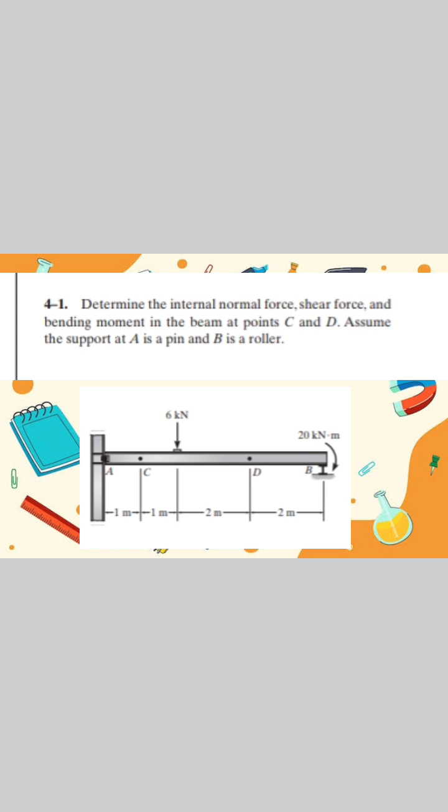In this video, I'm going to solve one of the problems in structural theory, problem 4-1: determine the internal normal force, shear force, and bending moment in the beam at points C and D. Assume the support at A is a pin and B is a roller. Let's get started.

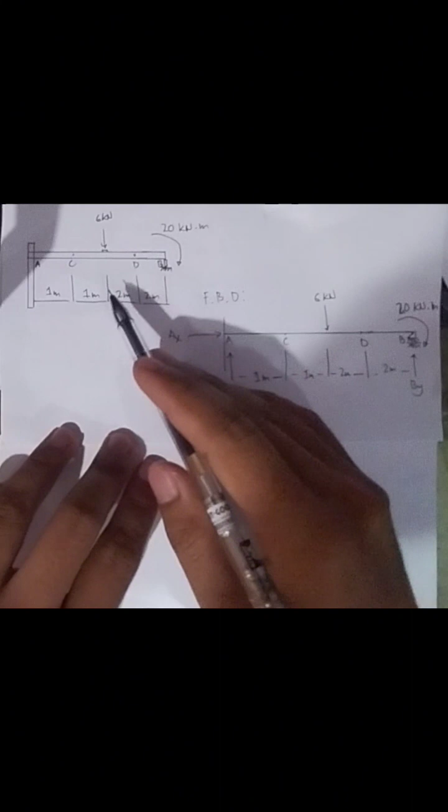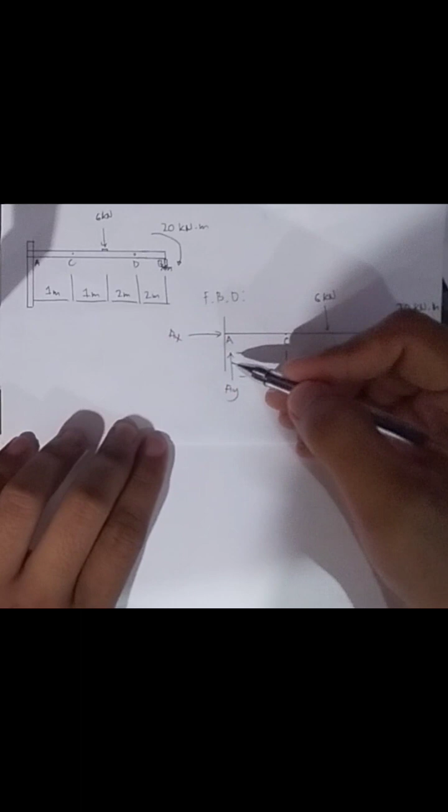First, let's draw the free body diagram of the given problem. The problem states that point A is a pin support, which we know has two reactions: horizontal and vertical. So that's AX and AY.

Next is point B, which is a roller. We know that a roller can only resist vertical forces, which is BY. So we'll take the moment at A to find the missing BY.

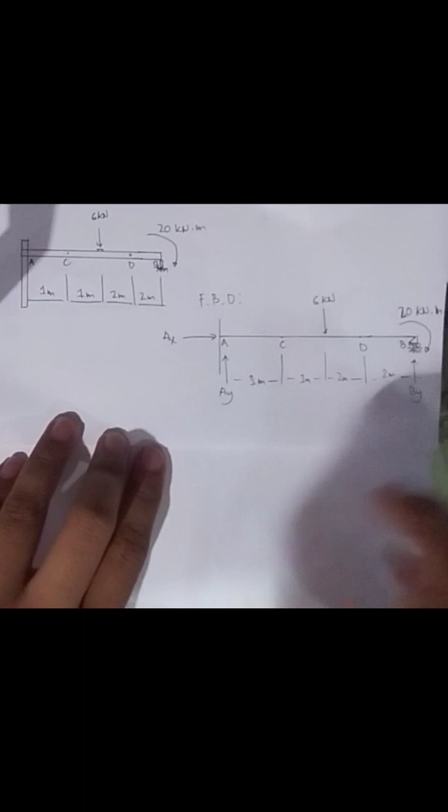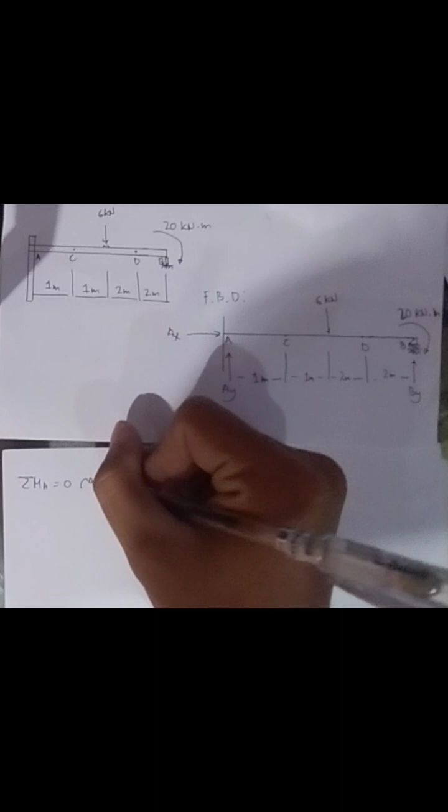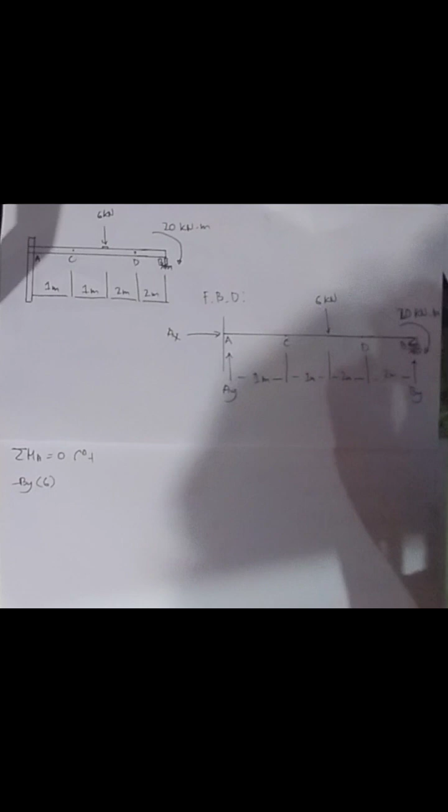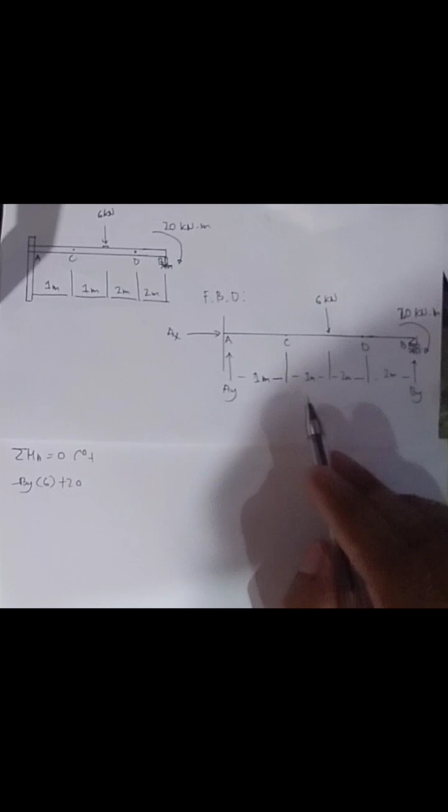Summation of moment at A equals 0, with clockwise as positive. First is BY, which goes counterclockwise, so it's negative. Negative BY times its moment arm of 2 plus 2 plus 1 plus 1, which is 6 total. Then the 20 kN·m goes clockwise, and it doesn't need a moment arm since it's already in kilonewton-meters, so plus 20. Last is the 6 kN going clockwise, with a moment arm of 2, so plus 6 times 2, equals 0.

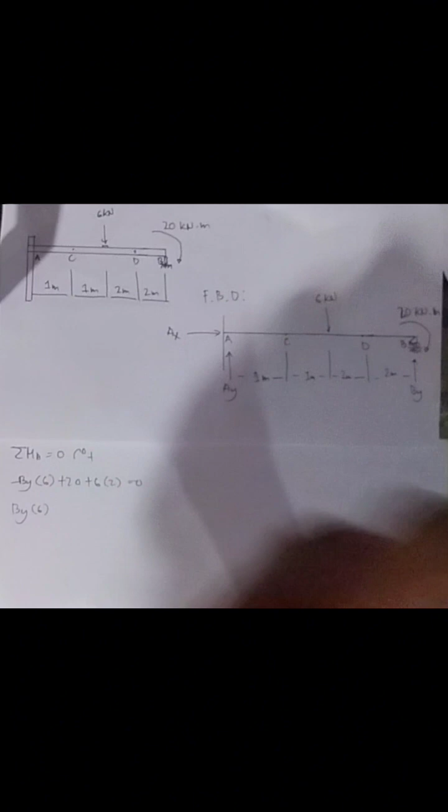Let's transpose the BY to the other side, making negative BY positive. So BY times 6 equals 20 plus 6 times 2. Let's calculate: 20 plus 6 times 2 equals 32.

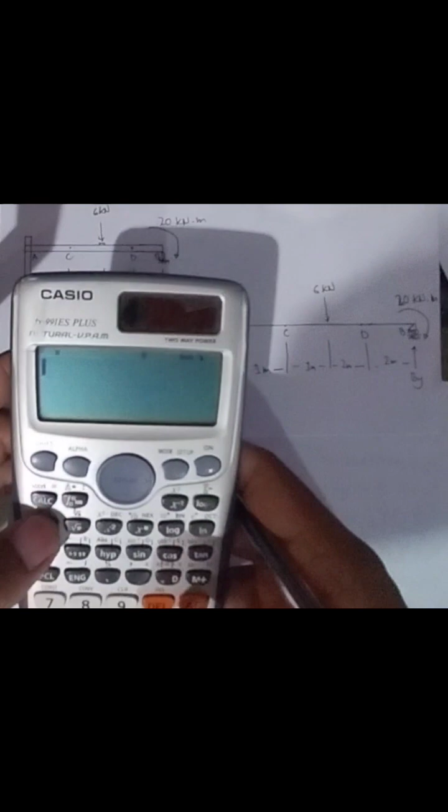So BY times 6 equals 32. Let's divide both sides by 6 to cancel it out. 32 divided by 6 equals 5.333. So our BY equals 5.333 kN. Next, we'll find AY.

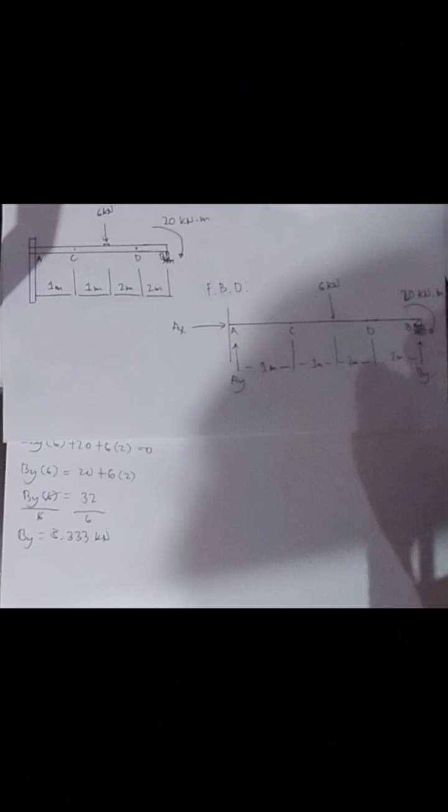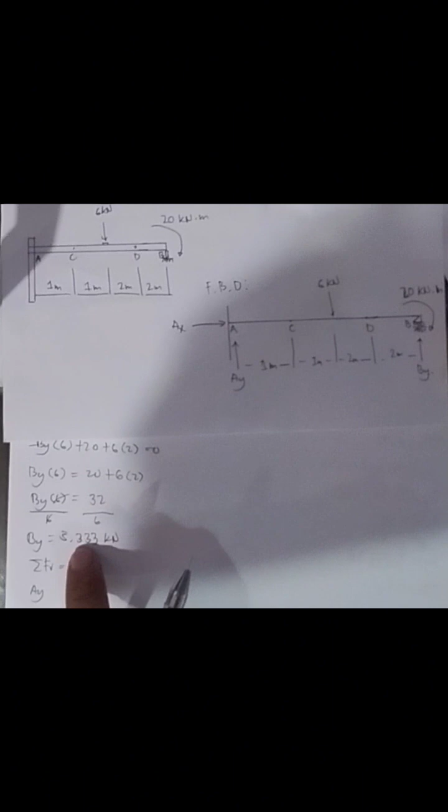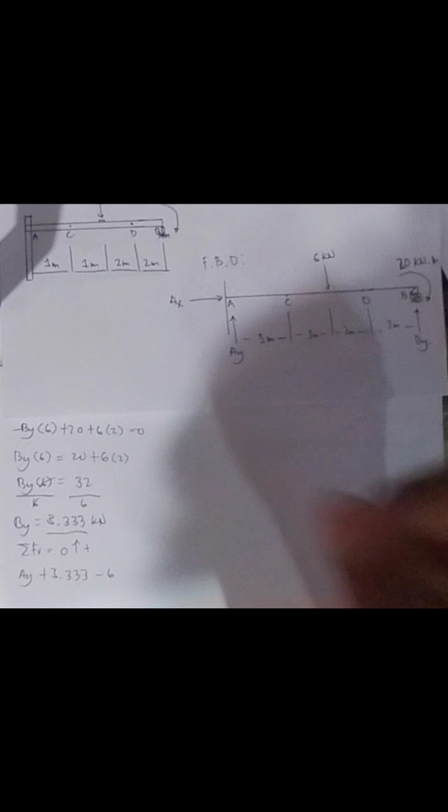Next is our BY value, which is 5.333, going upward so it's positive. Next is the 6 kN going downward, so it's negative, minus 6, equals 0. Let's move these terms to the other side: positive 5.333 becomes negative, and negative 6 becomes positive.

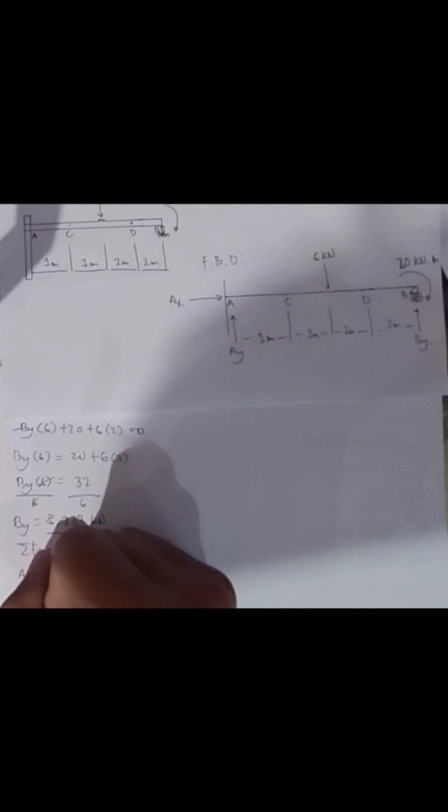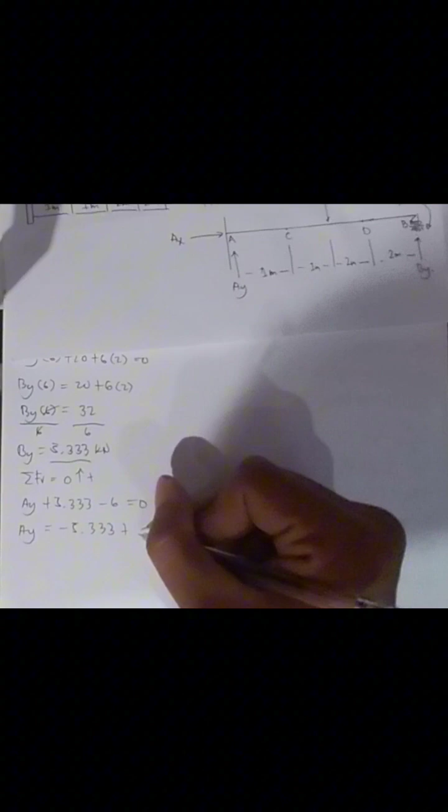So AY equals negative 5.333 plus 6, which equals 0.667. So our AY equals 0.667 kN. And lastly is our AX.

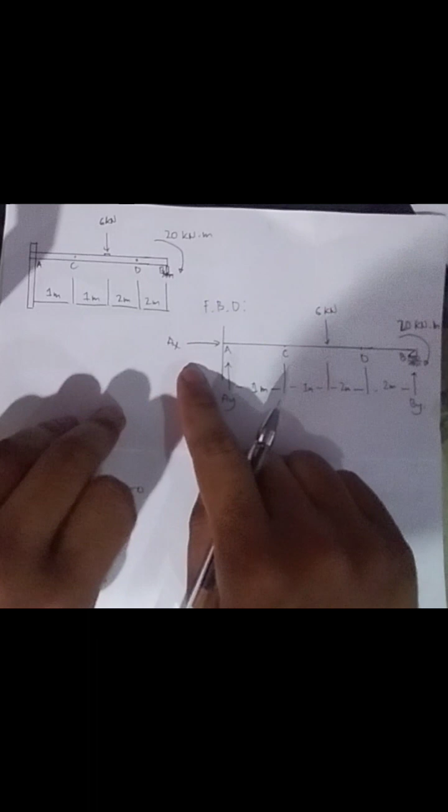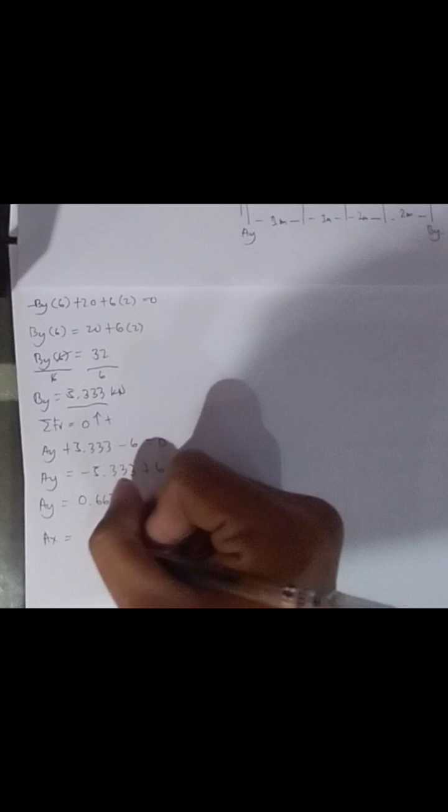Next, we'll make a section cut. Since the problem asks for internal normal force, shear force, and bending moment at points C and D, let's cut first at C, from A to C, at segment AC. Let's draw it.

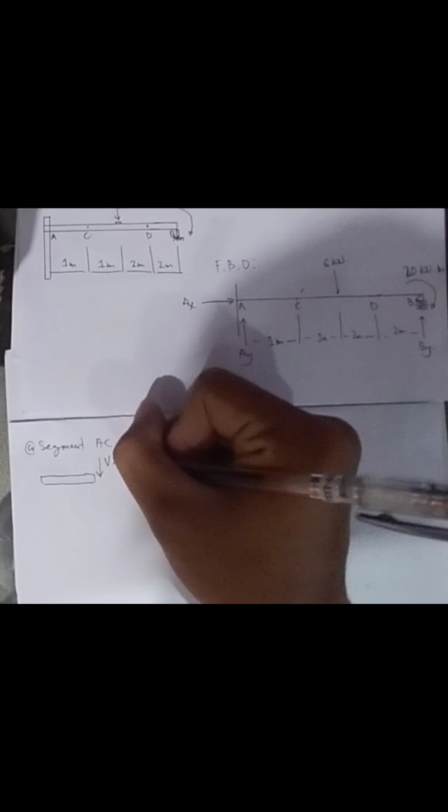Let's assume directions for the forces. Our shear force, assume downward, VC. The normal force NC to the right. And the moment MC counterclockwise. If the answer comes out positive later, that means our assumed direction was correct.

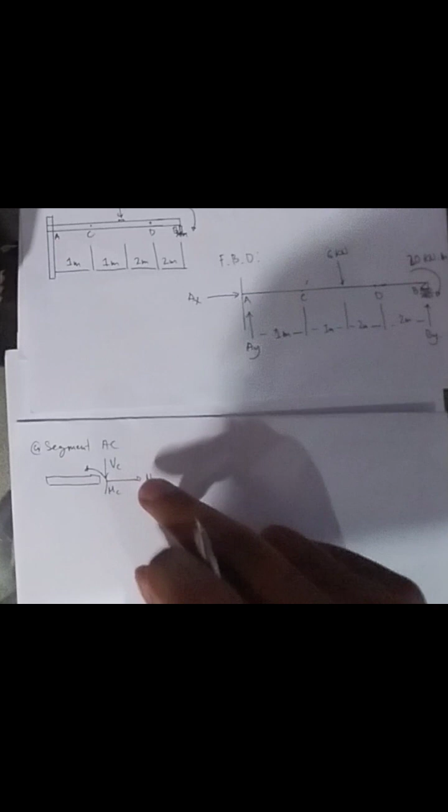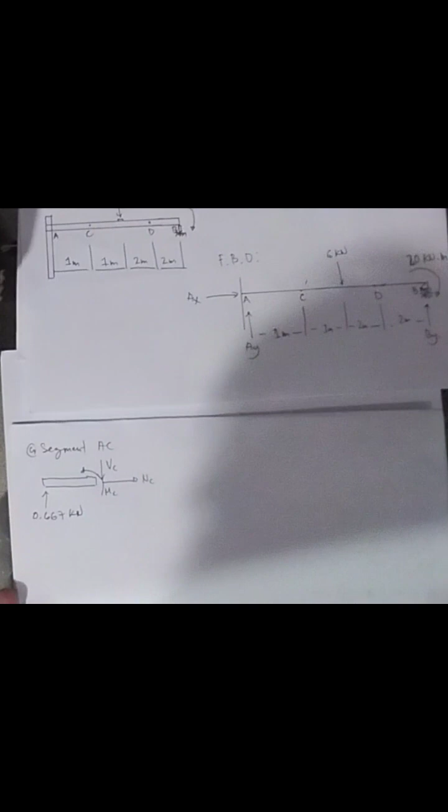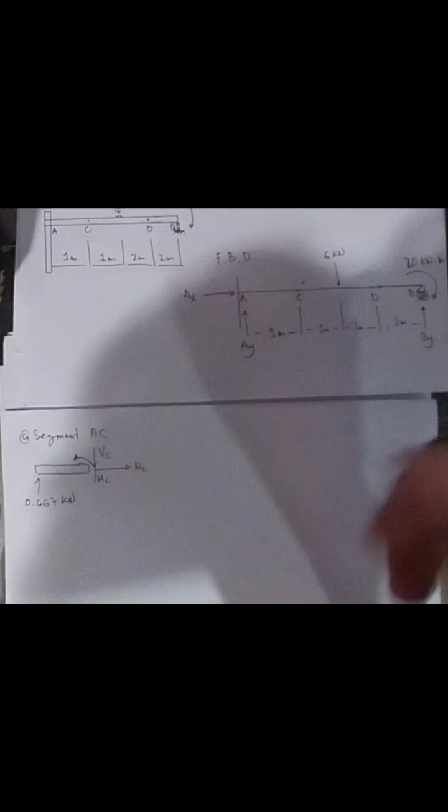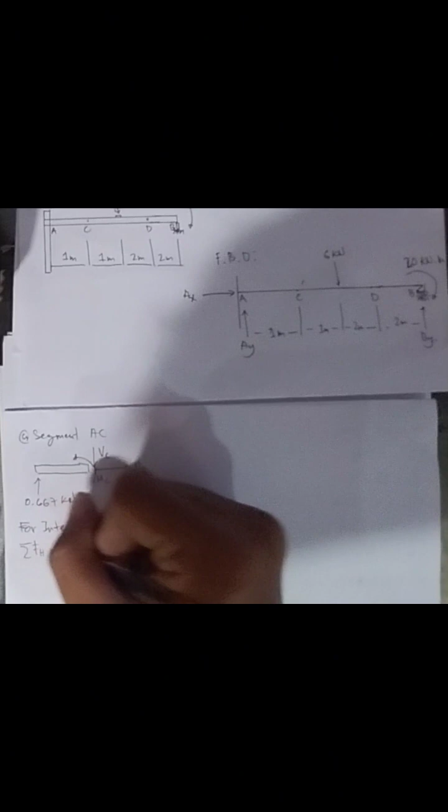First, let's get the internal normal force, NC, using summation of forces horizontal. Summation of forces horizontal equals 0, with right as positive. What acts here horizontally? Just NC alone. So therefore, NC equals 0.

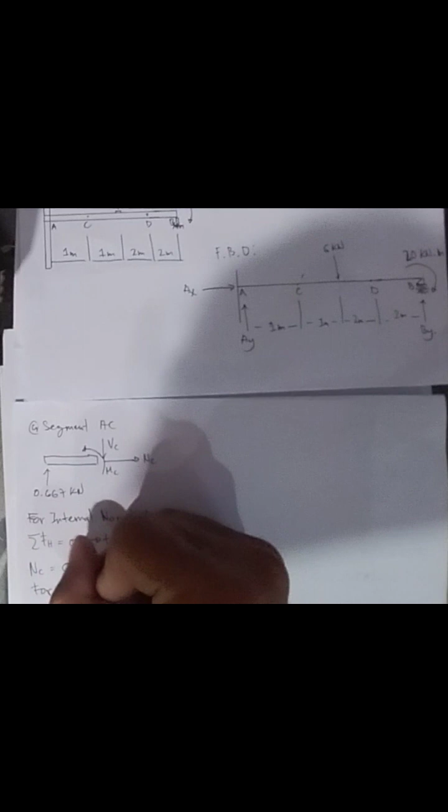What other horizontal force acts here? Just NC. Next is for shear force. What acts here in shear force is the downward force and our reaction of 0.667. So we'll use summation of forces vertical equals 0.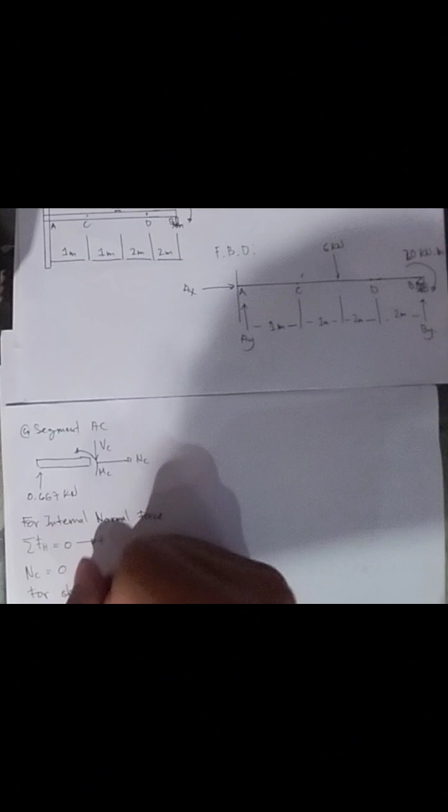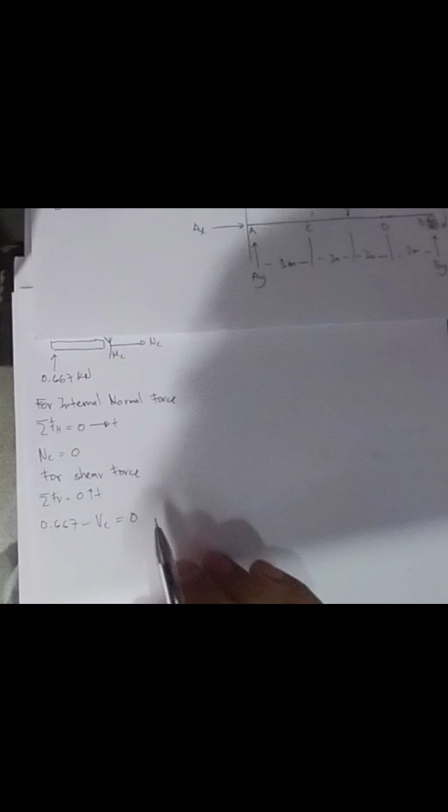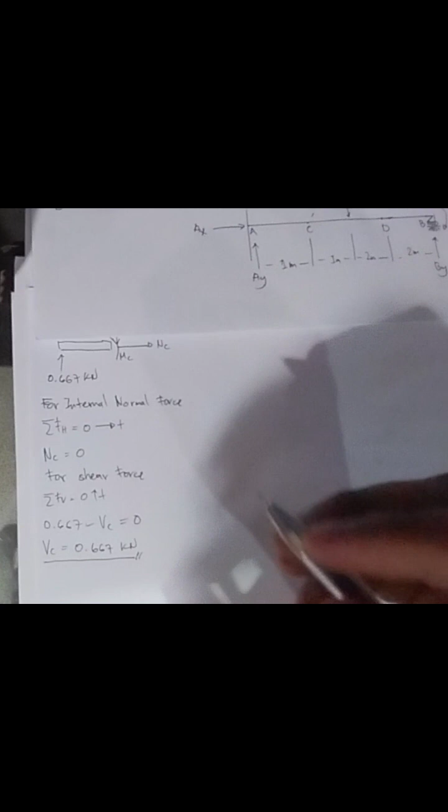With upward as positive: positive 0.667 minus VC equals 0. Let's transpose VC to make it positive. Therefore, VC equals 0.667 kilonewton. So this is the shear force, 0.667, and the internal normal force is 0.

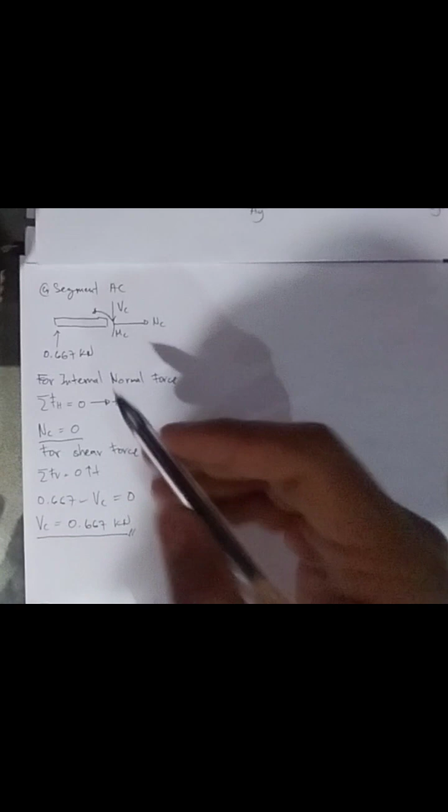Lastly, for this segment we need the bending moment, MC. So let's take the moment at C. Oh, we forgot the distance here, which is 1 meter.

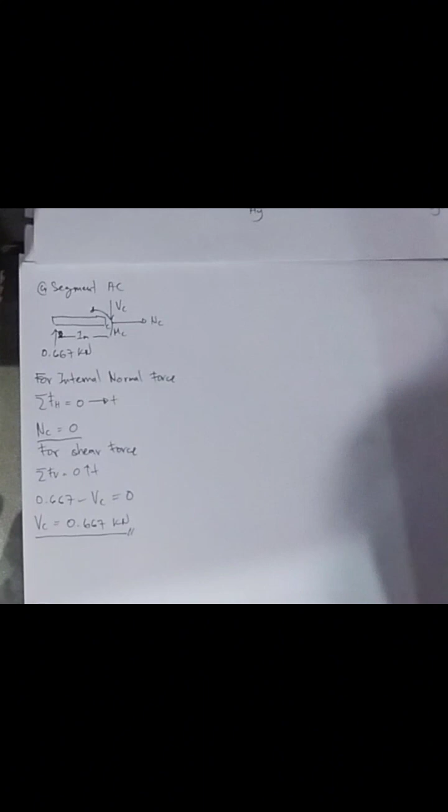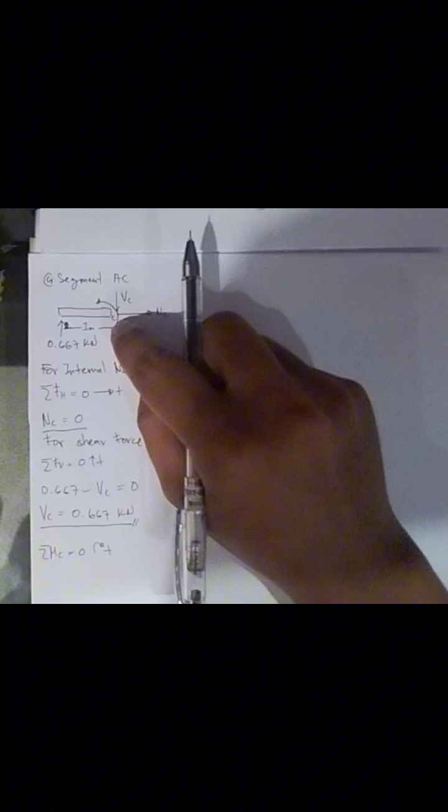So ayan, mag-moment tayo dito sa C para makuha natin itong bending moment dito na MC. Summation moment at C is equals to 0. Clockwise is positive. So ano ba ang umikot dito sa girder natin dito? Di ba yung MC pati yung 1?

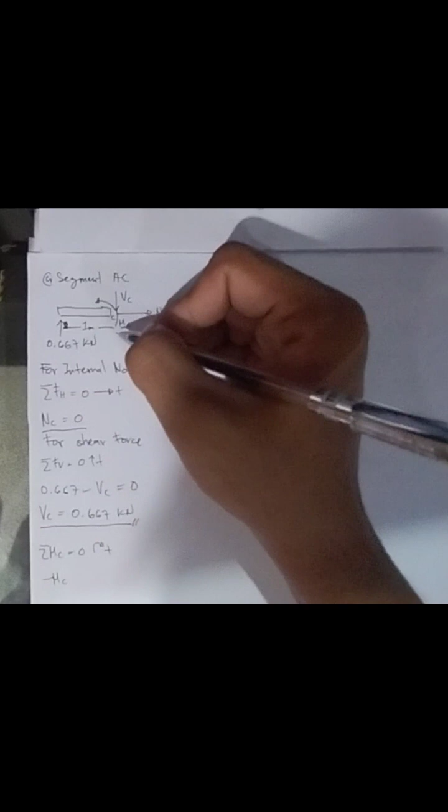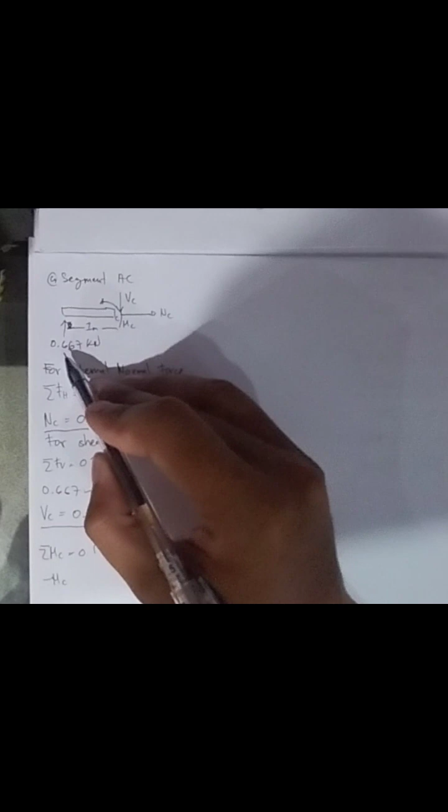So first is yung MC, negative siya kasi pa-counterclockwise. So negative MC, wala na siyang momento kasi naka kilonewton meter form na lang siya. Then next is yung 0.667 which is clockwise, so positive plus 0.667 multiply yung sa momento niya which is 0.667 times 1, which is equals to 0.

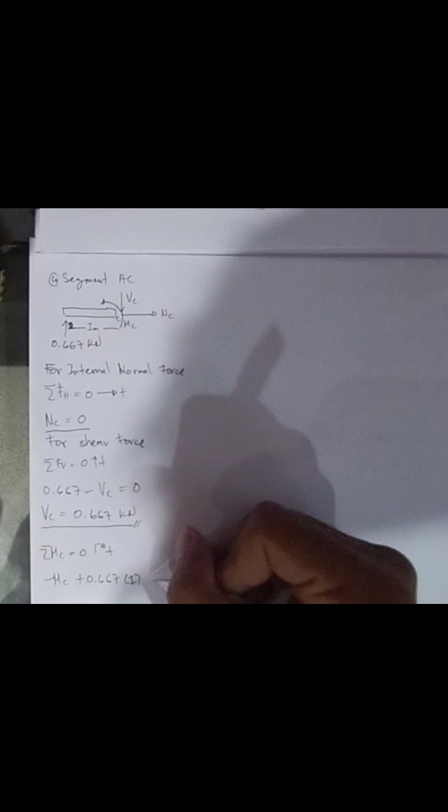So i-transpose lang natin itong MC sa kabila para maging positive siya. So MC is equals to 0.667 times 1, which is equals to 0.667 also. So ito na yung magiging sagot, ito na yung magiging internal bending moment niya.

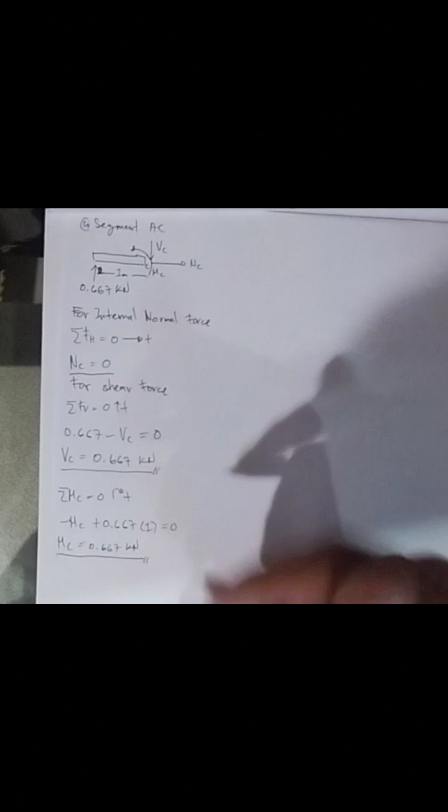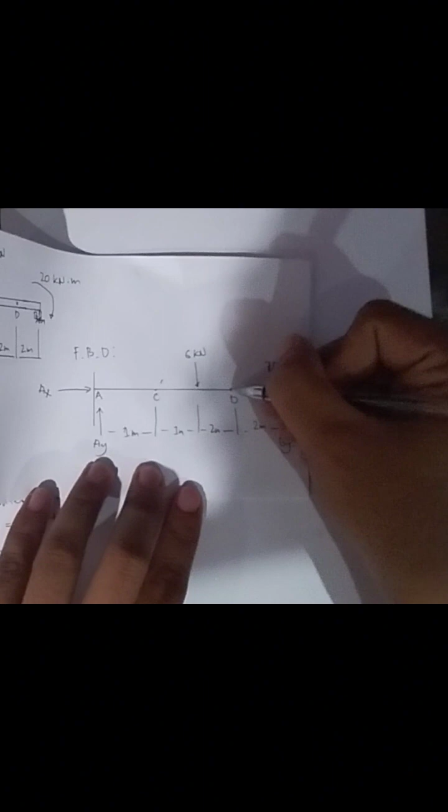So next naman is yung sa segment D to B. Kasi dito, yung kailangan natin, yung D, sa point dito. So dito naman tayo sa right side, yung B and D. So i-drawing lang natin yan.

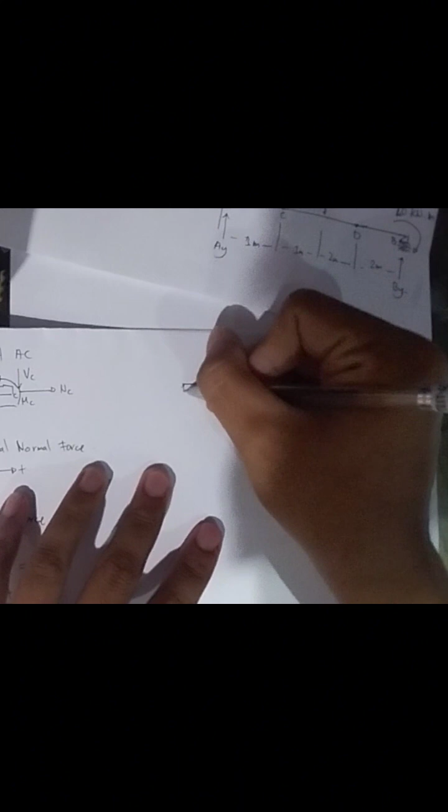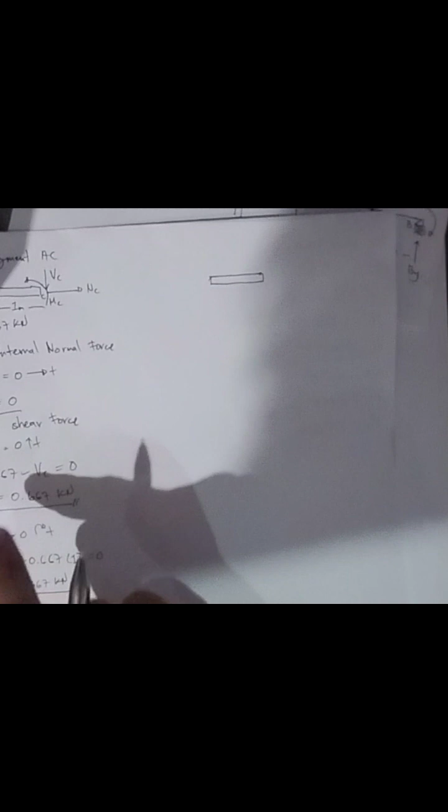Kagaya lang din sa ginawa natin dito sa segment AC, mag-assume lang rin tayo ng mga direction. Kung mag-positive man yung sagot, therefore yung mga assume natin ay tama. Tingnan natin yung sagot natin sa normal force, 0, tama rin yan. At yung sa shear force naman, which is positive din, and yung sa bending moment. So tama lahat ng assume natin dito.

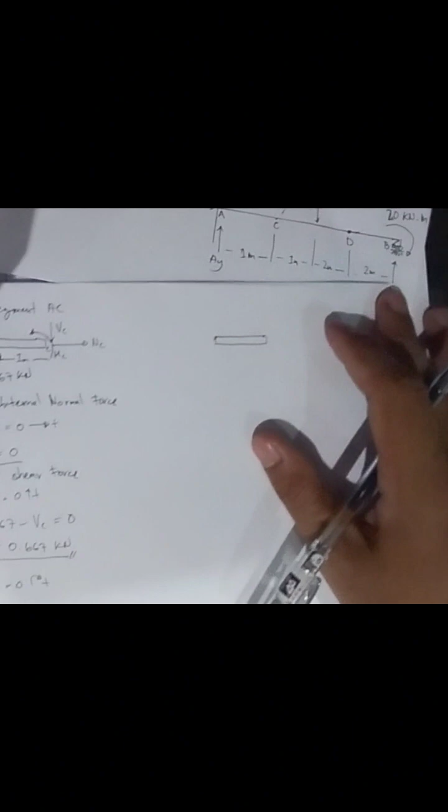So next is yung sa segment DB or BD. First, i-assume natin na yung moment niya ay pa-clockwise, MD. At yung shear force niya, i-assume natin na pa-upward siya, VD. At yung internal normal force niya, assume natin na to the left siya, ND. At huwag natin kalimutan din yung reaction dito sa B, yung By natin dito.

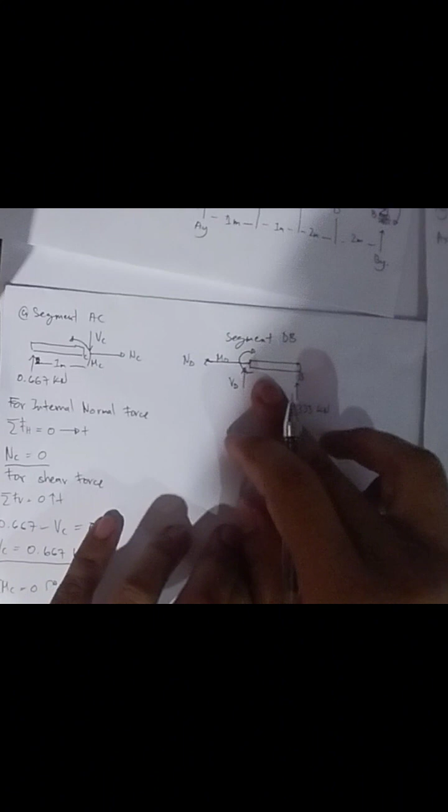Ang value niya ay yung 5.333 kN, upward siya. At also yung distance nung B to D, which is 2 meters. So yan, pwede na natin makuha yung mga internal forces nila.

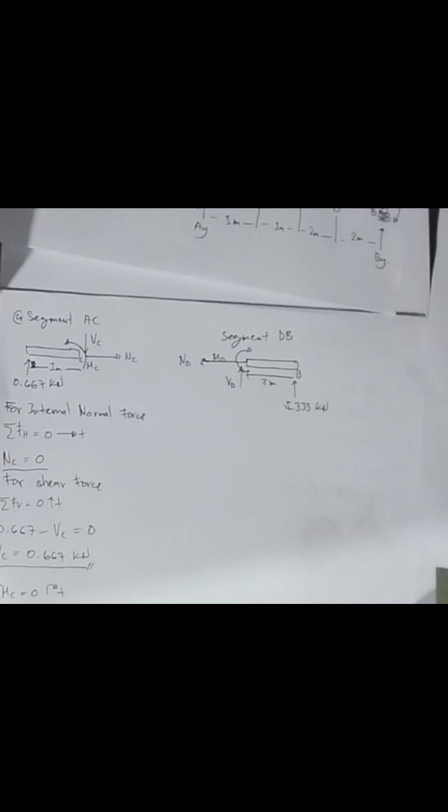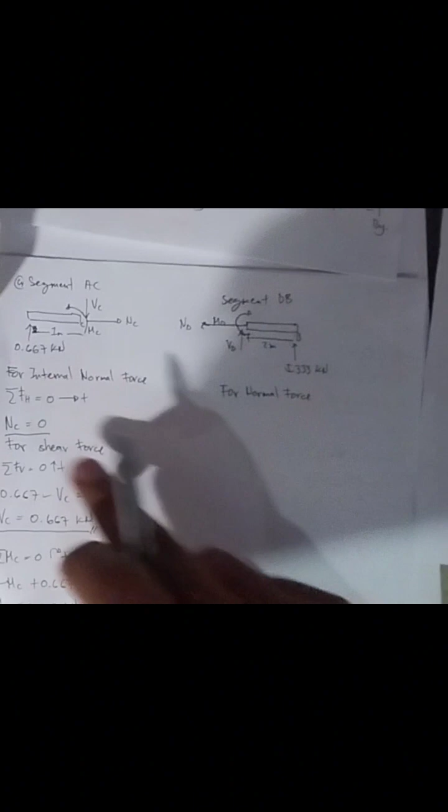So for normal force, same pa rin ang gagawin natin, same sa ginawa natin dito sa segment AC. So magsa-summation forces horizontal tayo para makuha natin yung internal normal force. Summation force horizontal is equals to 0, to the right is positive. Therefore naiiwan dito ay yung ND lang rin naman ang nasa horizontal force natin dito, so matic 0 na rin yan. So ND is equals to 0.

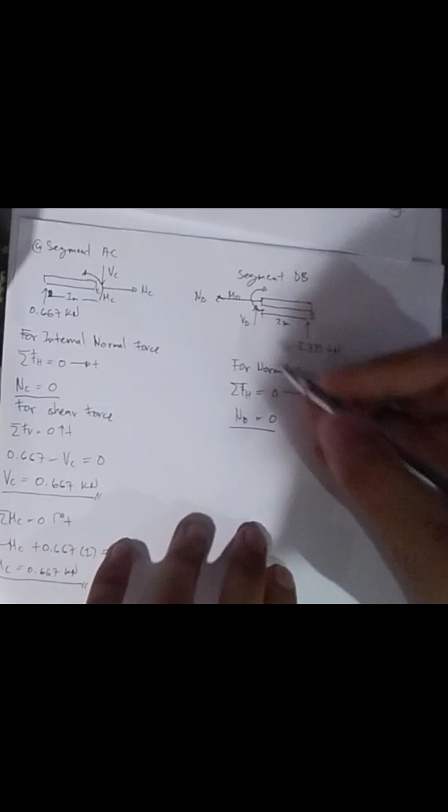So ang internal normal force natin dito ay 0 lang. Actually, assume na natin na 0 naman yan. Wala naman kasi talagang force dito na pa-horizontal eh, kita naman dun pa lang sa problem. Walang force na pa-horizontal, so assume na natin talaga yan na yung internal normal force dito ay lahat 0.

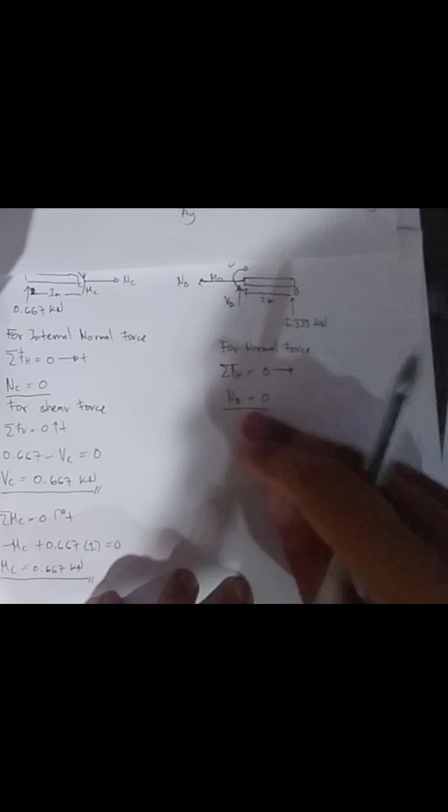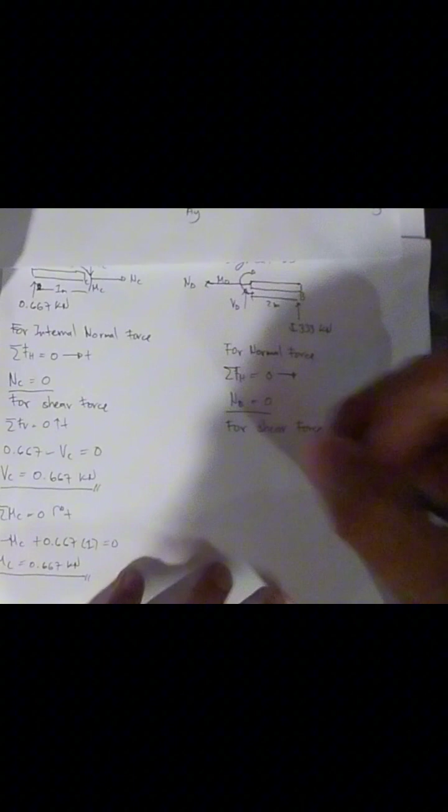So next is yung sa shear force niya. Summation forces vertical is equals to 0, upward is positive. So first is yung positive paakyat na 5.333, plus yung VD natin, which is paakyat rin. So plus VD.

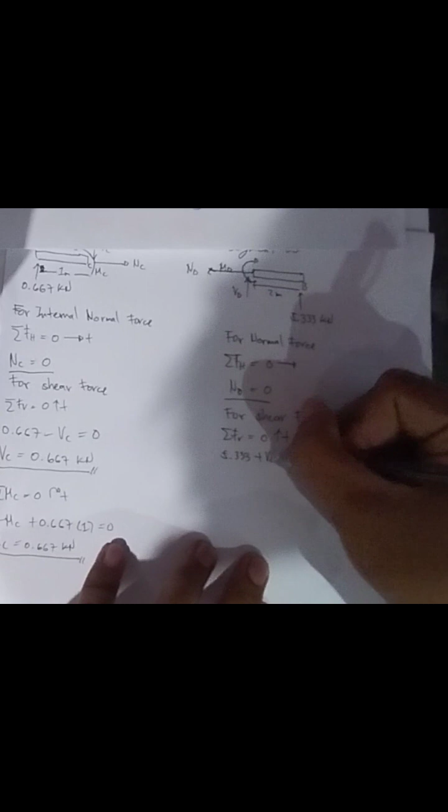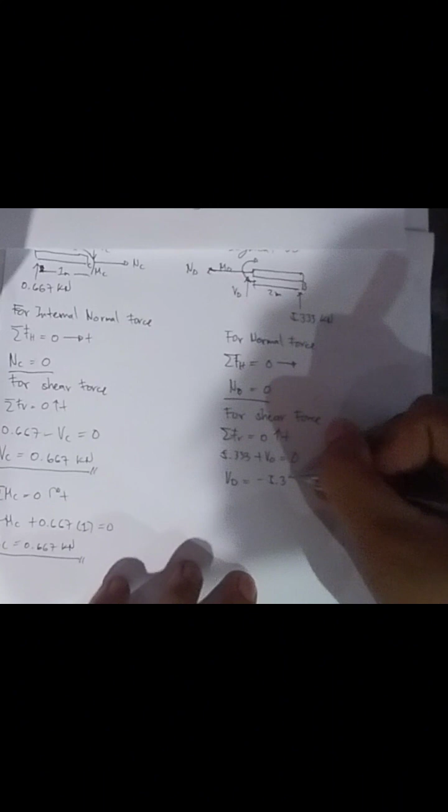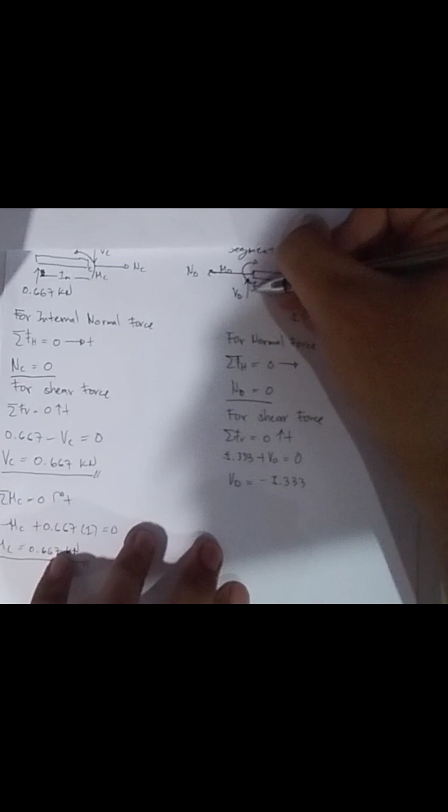I-transpose lang natin to. So VD is equals to negative 5.333. Ibig sabihin yung in-assume natin dito na direction ay mali. So dapat pala pa-downward siya, downward dapat ito siya, para ito mag-negative siya.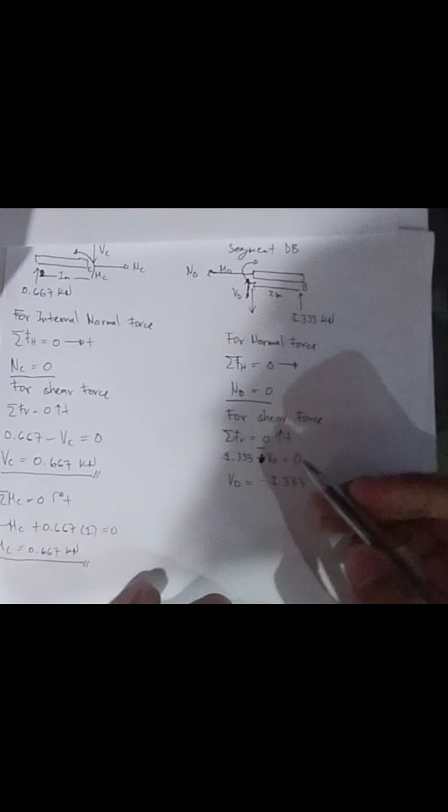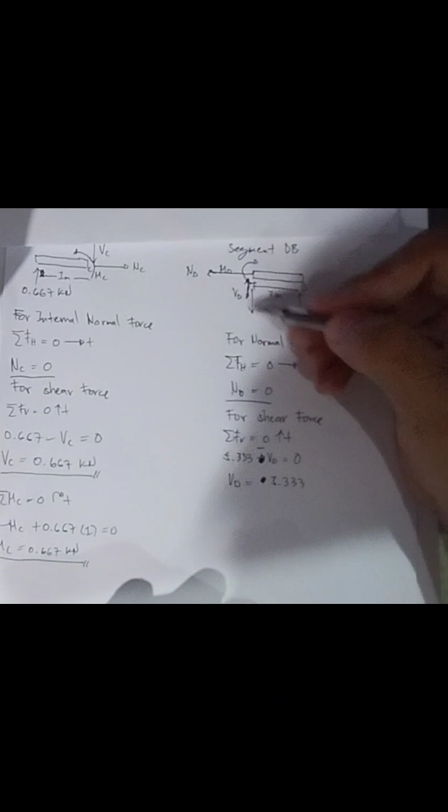So mag-negative dito siya, pag i-transpose natin yan, ito magiging positive, ito maiwan din positive. So dapat ganito siya, mababa dapat yung internal shear force niya. So dapat pababa pala. So ito na, VD is equals to 5.333 at lastly yung bending moment niya, which is mag-moment tayo dito sa D.

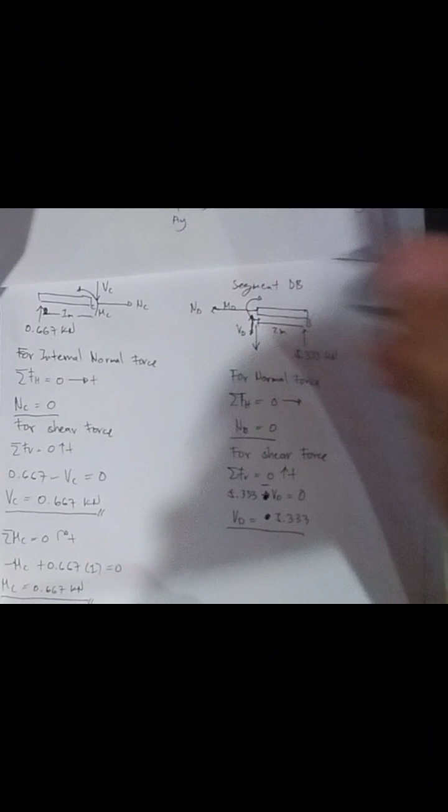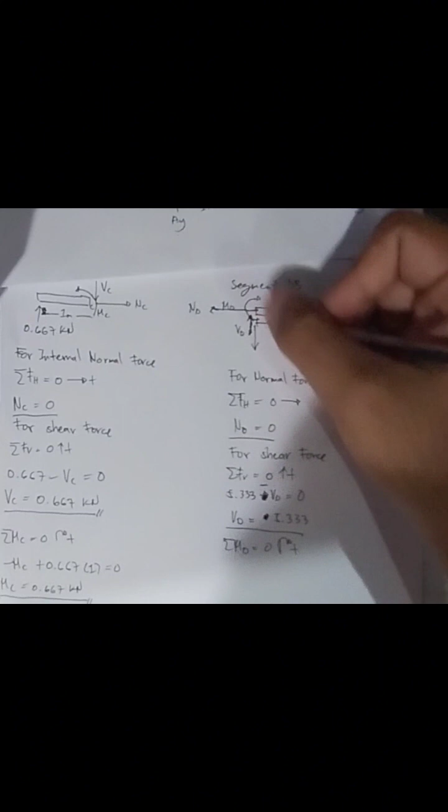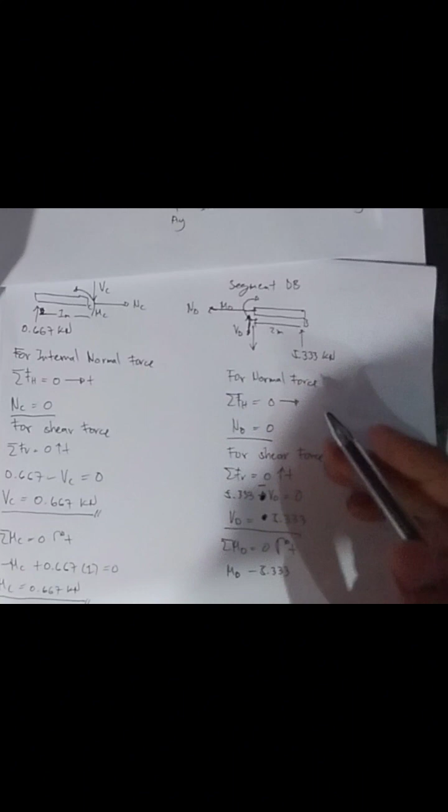Summation moment at D is equals to 0, clockwise is positive. So since pa-clockwise, so MD. Next is yung 5.333, which is counterclockwise, minus 5.333 multiply siya sa 2.

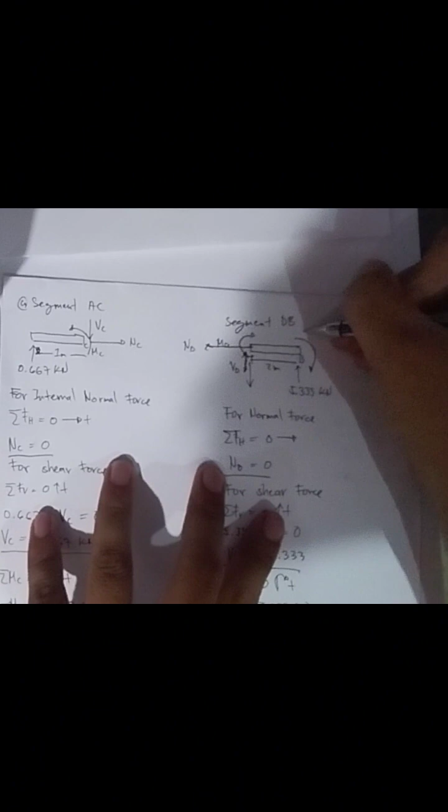At also may nakalimutan pala tayong ilagay dito, yung may naiwan pala dito. Ito yung 20 kN meter. Nakalimutan natin ilagay dito, so meron pa palang another moment dito, 20 kN meter pala yan. So yun, since clockwise siya, so plus lang yan. Plus 20 is equals to 0.

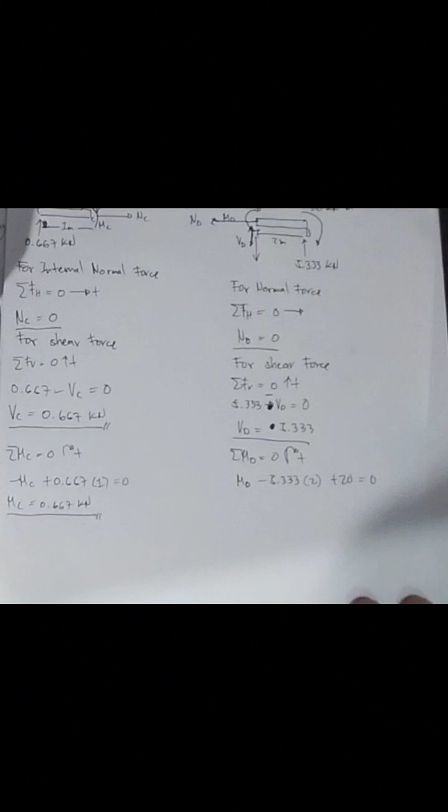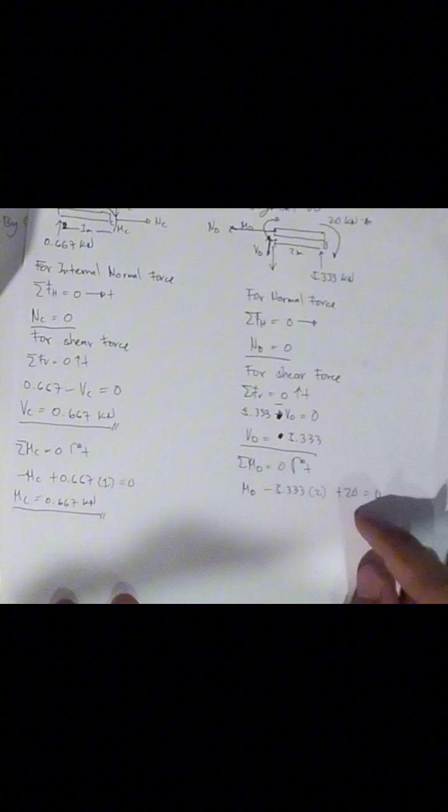So i-transpose lang natin itong mga value dito, lipatan natin sa kabila. Itong 5 ay magiging positive and yung 20 ay magiging negative. So MD is equals to 5.333 times 2 minus 20.

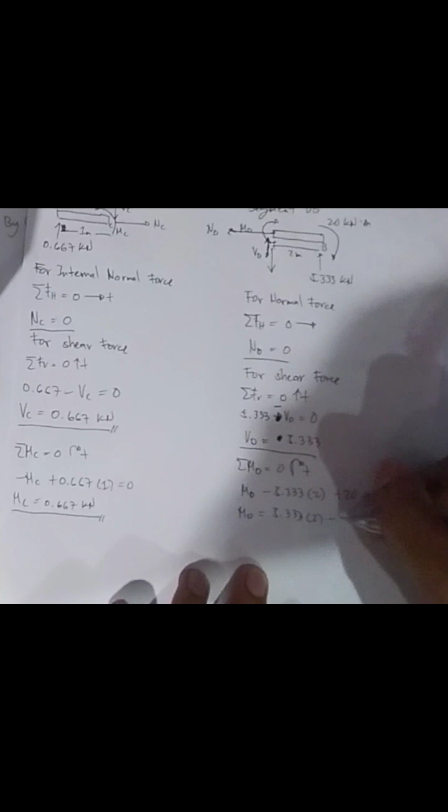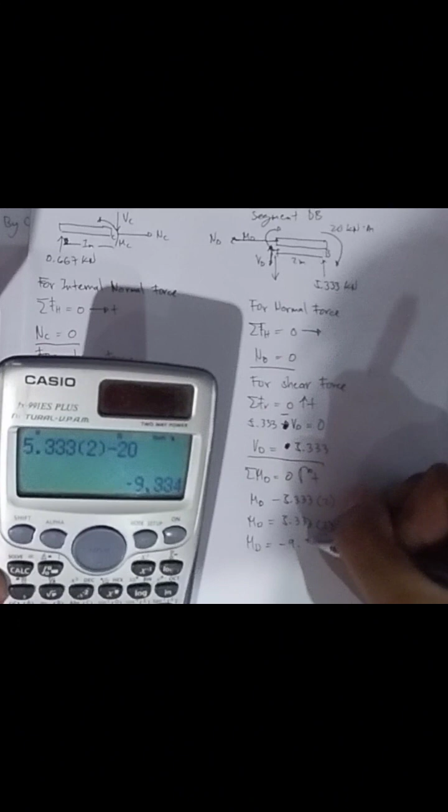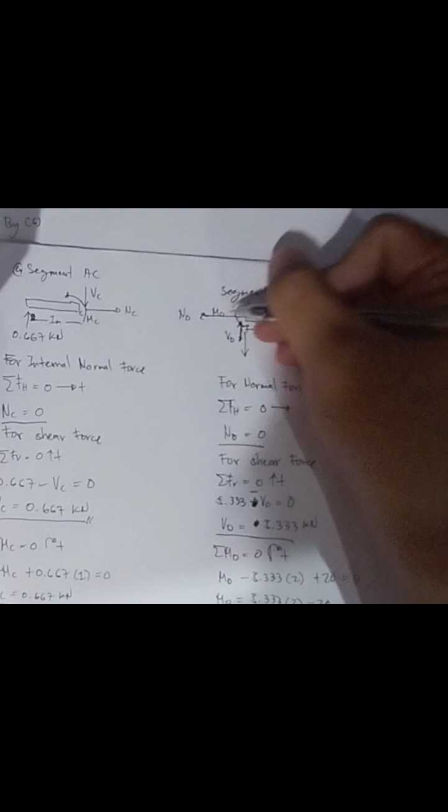Yan, i-calculate lang natin yan. 5.333 times 2 minus 20 is equals to negative 9.334. So malinaw naman na yung in-assume natin na 9.334 kilonewton-meter ay mali na naman pala yung direction nito. So dapat pala yung direction ng moment dito, yung bending moment, ay dapat pa-counterclockwise siya.